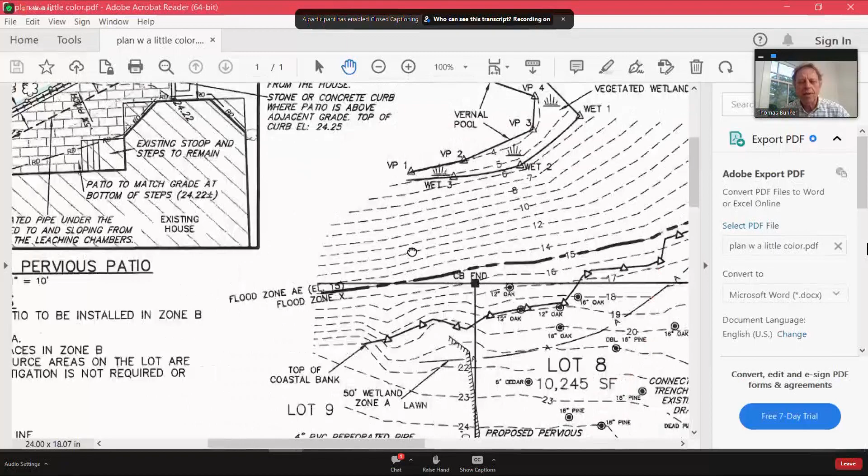Thank you. I've been here once before and had a couple continuances to go over some changes. Last time there were a couple comments for how to improve the project and our presentation, and one was to add some more positive drainage and not just the pervious paver, which I agree is somewhat of a misnomer because the pavers themselves are not pervious. It's the joint between them that causes the perviousness of the whole assembly. Notice I didn't call it a structure—I don't believe a patio is a structure. I'll still say that.

So it has the same shape and form, but we have made a couple of changes to it. Before, I thought the applicant wanted it sloping from one end to the other, and now we've changed it so that there are a couple of steps down at the left side. It drops about a foot from the ground down to the patio, and then it's level—level with the bottom of the steps at this point and level over to this, but there's a slight pitch away from the house, like a half of one percent.

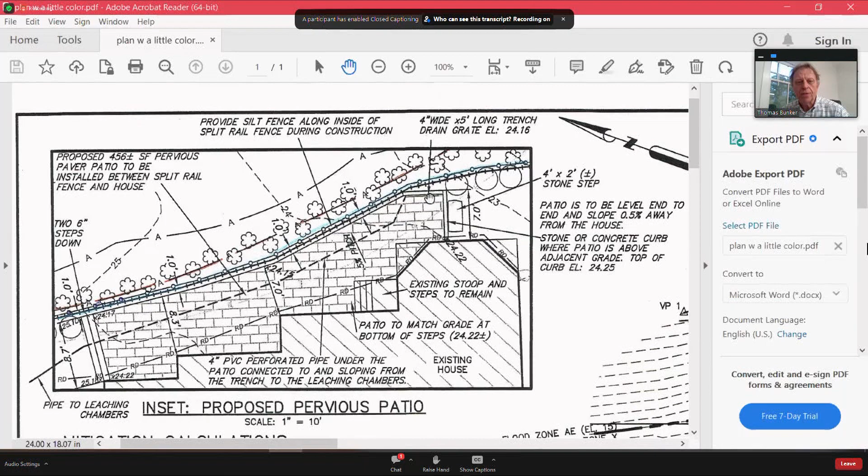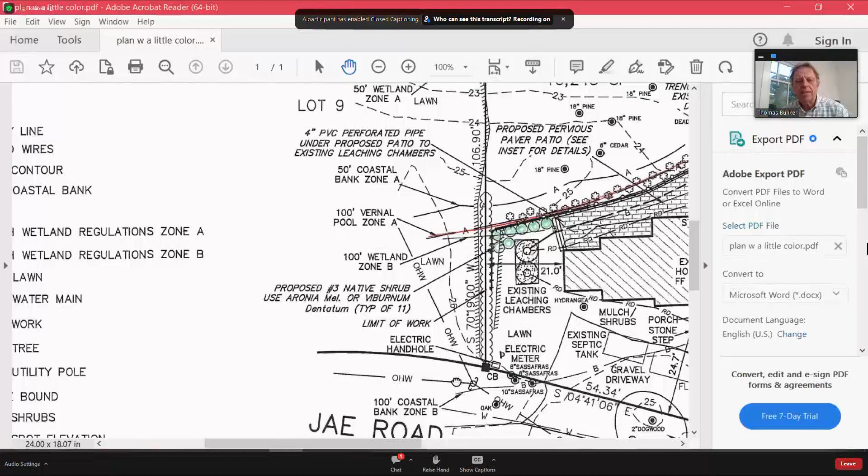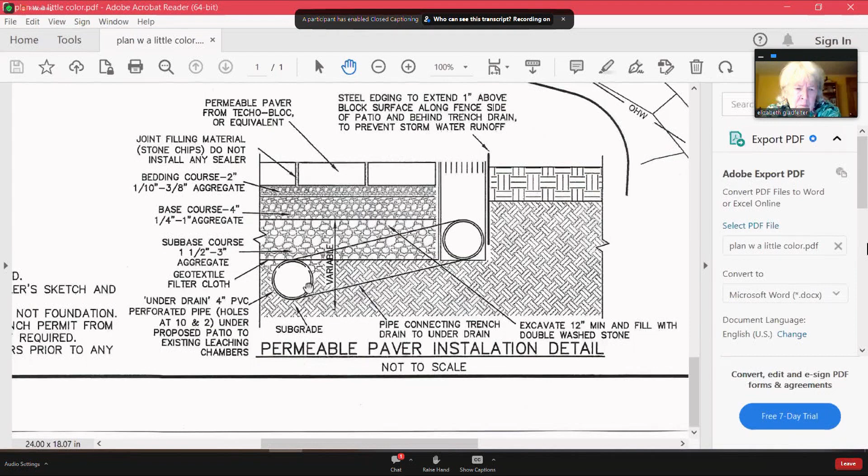And we've added—so that will cause the water to flow more slowly across and better able to go into the joints—we have added a trench drain at this location. There will be a slight pitch going down, and a trench drain at this location here to take in water. As previously in the detail, there's a steel edging side of this, which is 1 inch above the surface. So it will again hold the water, but then in a downpour, it will go into the trench drain, which is connected and runs through a perforated pipe.

So it'll collect all the water that drains through the cracks also, and that is connected to the existing leaching chambers. There were some large chambers put down when the house was built, and that was because the soil is very loamy, very fine textured loamy, and this is a large leaching area here.

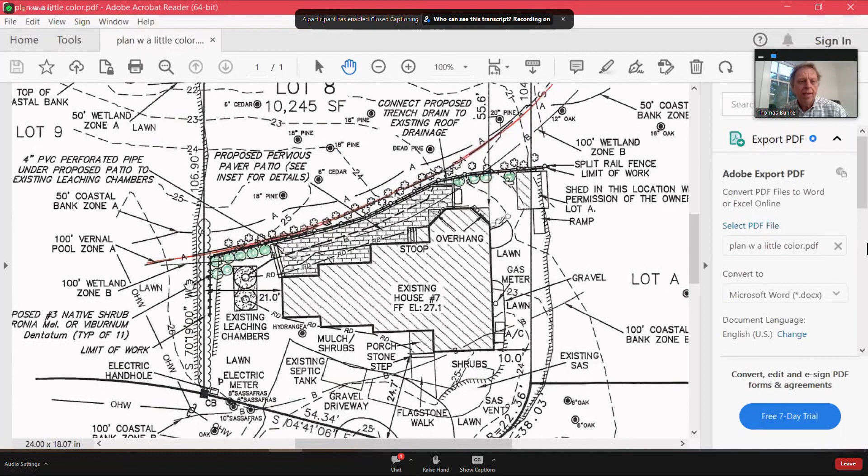In plan view, it's the same, but we've added leaching, which was one suggestion to move hopefully toward approval. Also, because this is in a zone B, not a zone A, there's a requirement to show some improvement to the resource area properties. So we have 11 native shrubs—either the Amelanchier, or rather Aronia, the chokeberry, black chokeberry, or Viburnum dentatum—7 of them over here and 4 of them over here toward the shed.

A few weeks ago, we sent over permission from the neighbor for her to maintain, or Teresa Mancini, the owner, to maintain a shed partly on this other property. So that has been approved. That was one of the concerns.

There is a fence, I'll show you. There's not just what you sometimes require along a zone A single rail fence, but there's actually a full split rail fence running here, the other way, along both sides.

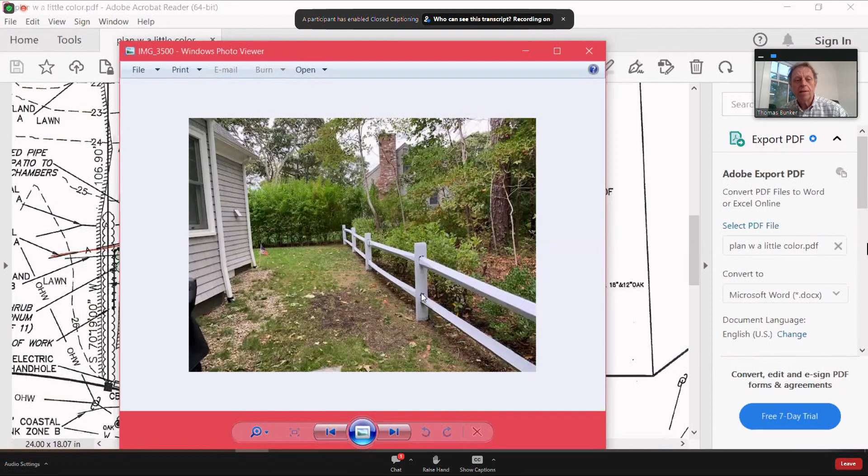This is looking toward where there'd be 8 more shrubs planted at this end of the fence, no sorry, 7 there and 4 down this end toward the shed.

One of the concerns of the staff was that people hanging out on the patio might cause that activity to flow over into this buffer. This is the full height split rail fence. I don't think that activity will flow over.

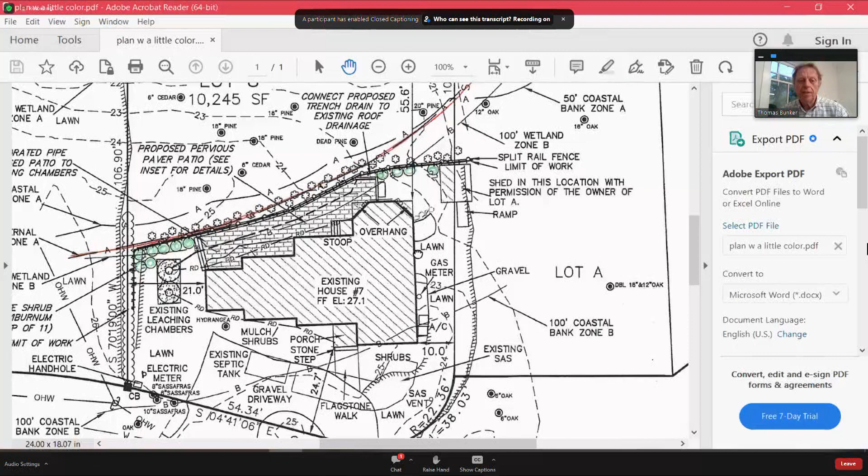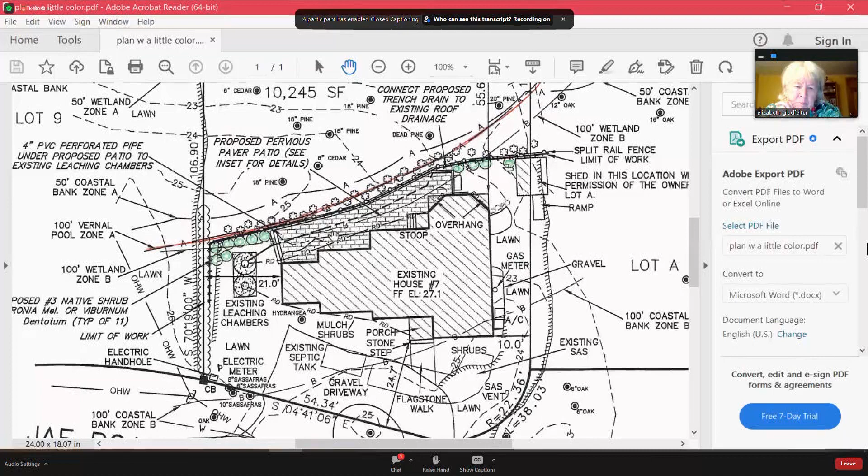I don't think this is contrary to the regulation that you have no structures within that buffer, which is partly so there's room to move around the structure for maintenance and repairs. This patio will provide that movement around the structure, and I don't think it will be harmful to the environment. So I will take this down now.

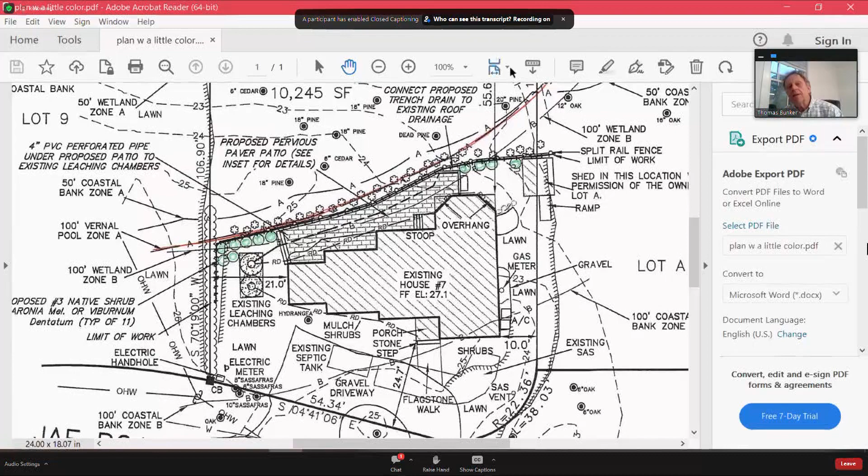Thank you. Thanks, Tom. Ms. Bergeron. Thank you.

Thanks, Tom, for sending in all those revisions and giving us that great cross-section of how the patio will work. That's really interesting to see how it's all connected. As I wrote in the staff report, simply upholding the regulations, staff's position hasn't changed on the project.

Definition of structure aside, patios have been described, at least during some of these hearings, as structures, and either way, at least we can all agree it's not part of the present primary structure. The regulations do say that if the no disturbance zone is naturally vegetated, then a no structure zone is added on, simply as another added protection to the A zone regarding any cutting of the vegetation, disturbance of it, or encroachment.

If the board does approve this project, we would ask that you explain in detail why this type of hardscape is permittable in the no structure zone, simply so we can further advise other applicants. This is not the first request we've seen for a patio in a newly developed lot. We have typically advised against it at the staff level simply because of the no structure zone regulation.

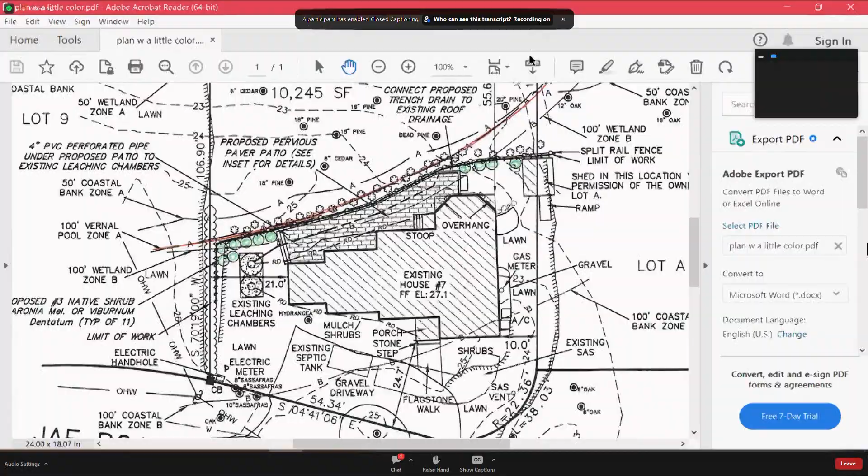Can you see that? Yes, excellent. All right. So, engineering works - existing house recently had its septic system replaced, and the Bradleys would like to put an elevated deck of dimensions 14 by 20 on the back. It will be a 2nd-story deck.

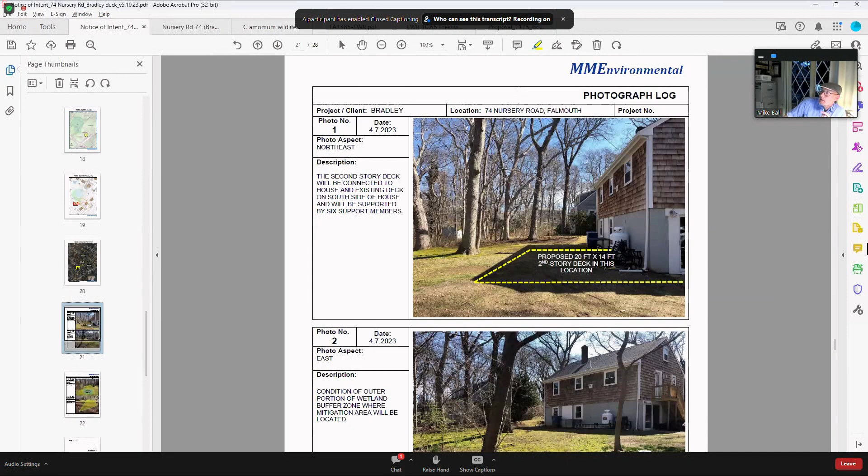A couple of images I provided in the notice of intent, I hope you can see, showing where that deck will go. That's an approximate boundary of the proposed deck. That's a better image showing the existing conditions. As you can see, the rear yard is relatively unmanaged. No fill will be needed to be added or replaced. No native vegetation will be removed.

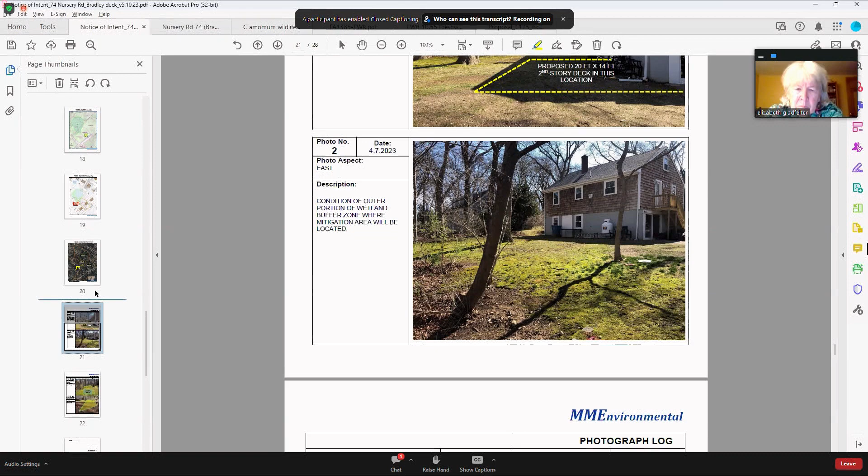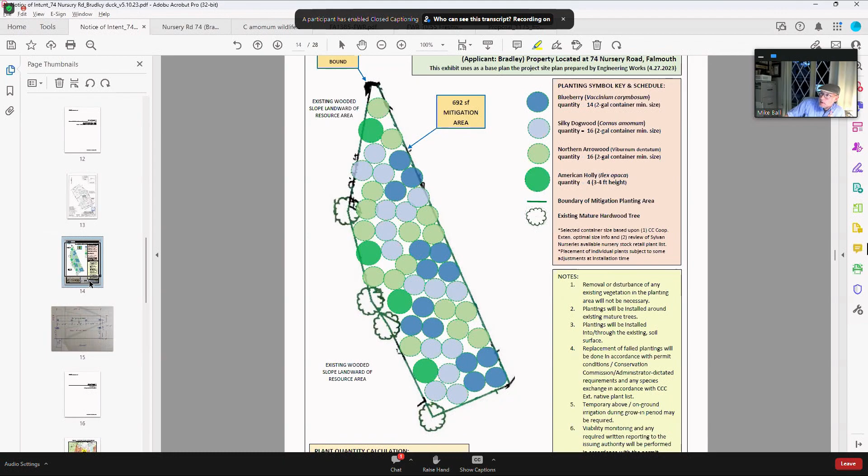In accordance with your regulations, we will be adding a mitigation area consisting of 50 native shrubs. Based on staff report, I believe we did exceed the proposed mitigation amount by some square feet. The project itself is in the outer 50 feet of the freshwater wetland buffer zone. Mitigation will be provided in the inner 50 feet of the buffer zone to this isolated wetland. No rare species issues. I do believe it meets the requirements for Zone A, Zone B mitigation and does serve the interests of both the Wetlands Act and your bylaw.

And I'd be very happy to answer any questions you might have. Thank you, sir. You can stop sharing now. Yes, sir.

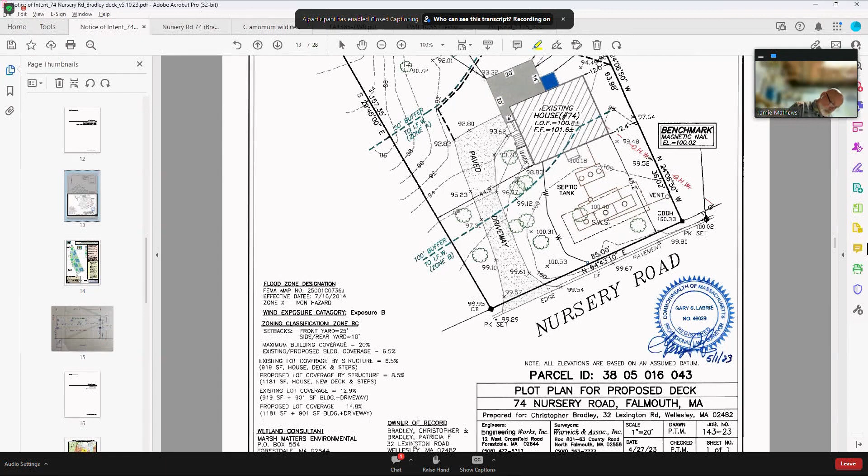Ms. Bergeron: Hi Mike, thanks for the presentation. One of our questions was just looking for a little more information on the silky dogwood. It's not one that we're too familiar with, so that handy dandy printout was actually for me, so thank you for that. And it looks like it does provide not only a thicket for wildlife, but it looks like it fruits and is good for insects. So definitely has some wildlife habitat value.

It looks like it's a larger plant, so plants are proposed at 4 feet on center. The board does typically require mitigation to be 3 feet on center, so I'll let them address that if they had concerns.

There was a note on your planting plan alluding to if there were any substitutions to be made to the approved plantings, that another could be chosen off the Cape Cod Cooperative's extension list. I would ask that they come through the staff so we can be in the loop and understand what's going to be planted and that it's in alignment with what the board usually requires.

Of course, I did send a photo, Mike - there's just sort of a leaf pile that's accumulated in the backyard, which will be right behind where the mitigation is. If that can be removed, just to try to keep the buffer as naturally vegetated as possible. That would be great. That shouldn't be a problem.

Excellent. And our only other note was it looked like the wetland did show some vernal pool characteristics, though it's not identified as one. I reached out to Mike, and he did say that when he evaluated the project, it wasn't quite the right time to go down and look for all of the wildlife that was down there.

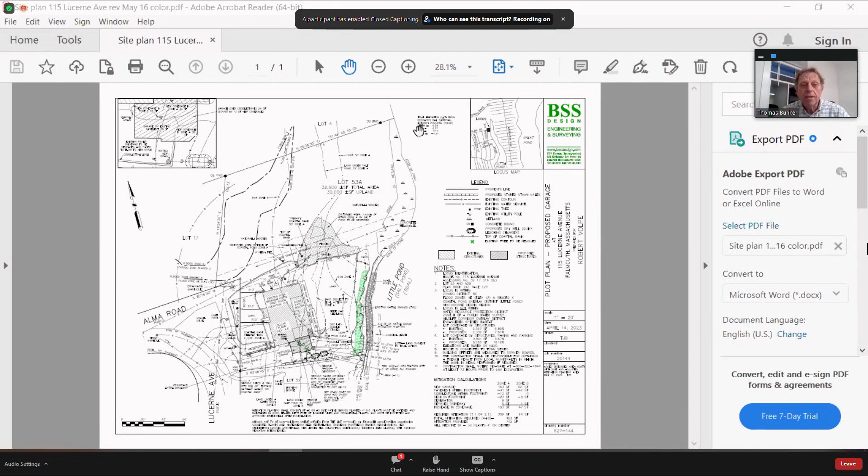So when we met with Alyssa and Jen on the site, there is an area where there was a lot of mulch. This fenced garden had hosta and other perennial ornamentals, and there was a mulched area. This fenced garden had chicken wire around it, with a lot of trees down, kind of laid around - this is like a little corral.

The owner explained it was to have a little refuge where rabbits could go to get away from coyotes. Just yesterday he wrote an email describing how a snapping turtle had come up, wandered around, and finally laid her eggs - I can't remember if that was in the sand or in this area they were working in, but it is an environment, though it's been disturbed.

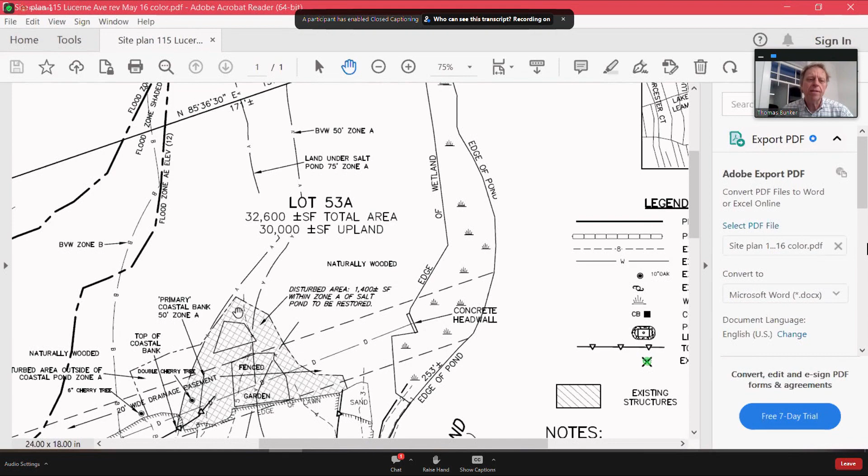So in this area, we continued the Zone A, 75-foot land under salt pond, to this area, and outlined roughly the area most impacted, where it has a higher density of ornamental plants. Some of that is outside of the Zone A, but basically we and the owner are instructed to revegetate. A planting plan will not be required because the owner knows pretty much what to do.

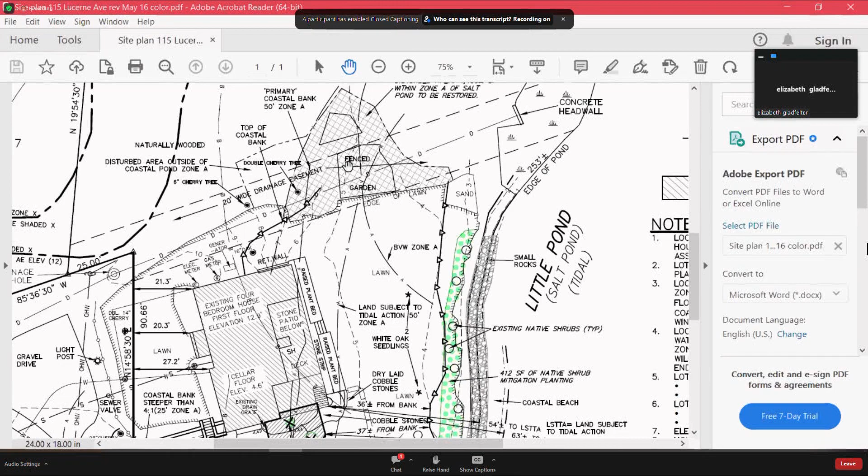He's good at planting and moving things. So this is the area, about 1,400 square feet, where he will be moving out all of the non-native ornamental plants and moving in native plants, from wherever, to make it more natural, native, and less maintained looking.

We had also outlined the planting area, the mitigation area, incorrectly - we hadn't taken account of some of these existing shrubs and other grasses that were here. So we located the existing shrubs, which are these circles, and put the 412 square feet of native shrubs landward of all of that. So this line of planting did come a little further landward than what we had shown on the original plan. That, I believe, covers what we were asked to do.

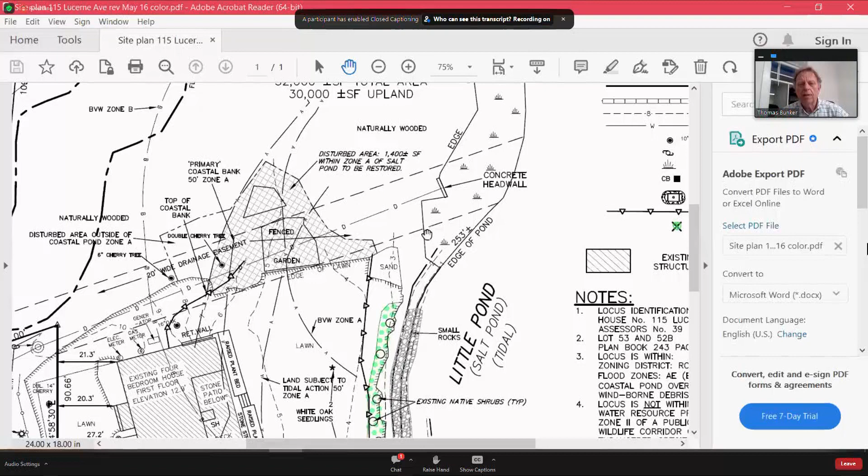Oh, we also had Mark Manganello - also, we submitted the BVW data sheet for this edge of wetland through here. So I think that covers what we were requested to do.

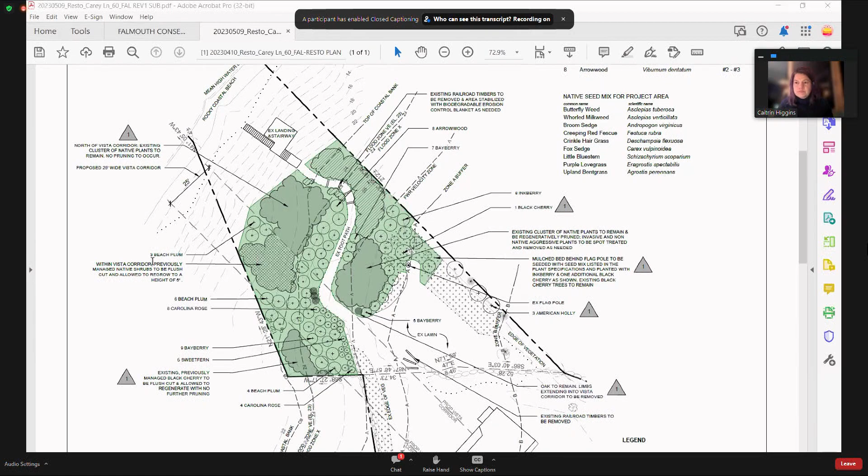I guess my one lingering question then about the flush cutting is, if you had to estimate in that area shown on your plan of natives, do you know about what percentage of that is the leggy single stem shrubs that would be flush cut?

I would say it's less than half. It's hard because you don't really notice them until you're in there among the shrubs, but there are some nice bayberries and things that have already been wind pruned just because of the existing conditions there. So I think that's probably the majority of the stuff in there. It wouldn't be - and we would be very mindful, we're not looking to clear that area. So without really having an accurate number, I'd say it's definitely less than half.